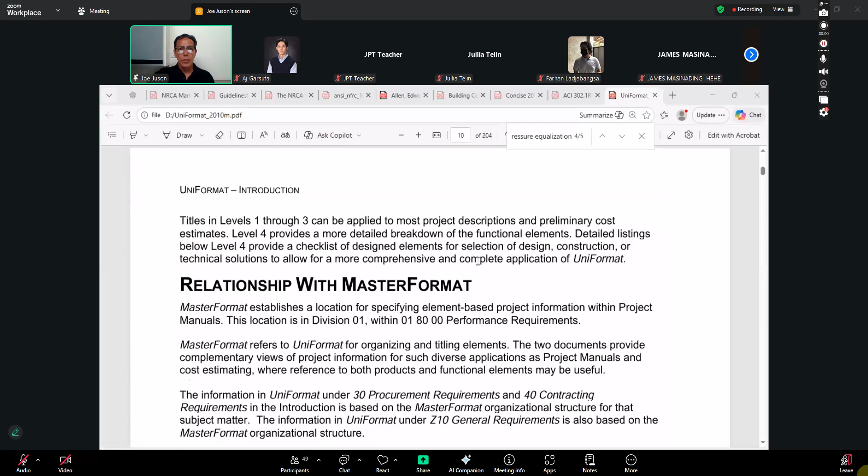So may mga explanations dito. What is the relationship of the unit between the uniformat and the master format? So as you can see, master format is about specifying.

That is not so much our concern right now. So we could now look at each of these. May mga explanations dito, but we don't really have to go there.

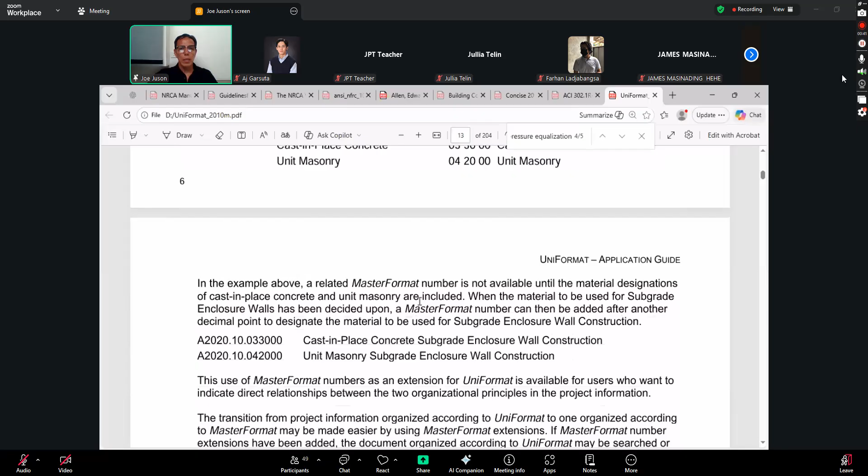We could now start with letter A. So saan magsisimula yan? Here. So the numbering, kasi outline to class, outline guide, for the standards or for the classification. Wag na yan, dito tayo sa letter A magsimula.

So remember, substructure is actually a building enclosure. Pero in building enclosure, the second stage, your agenda is more about protection and defense, how to defend your building. Substructure is one of the 4 elements that we are concerned about. But substructure is also a structure, remember? So nasa first stage tayo, nasa structural stage tayo.

And that is the part of the building that is below ground. So above ground, you call it a superstructure. So the site is on the ground, and not only that, even below ground is part of it. Is a concern. Do you understand now why am I discussing the substructure, including the foundation? Because that is part of the site. So ang building natin usually is, in a sense, relevant as a structure from ground all the way up, from ground below, that is like integrating it with the site. I know we could separate it, but that's why.

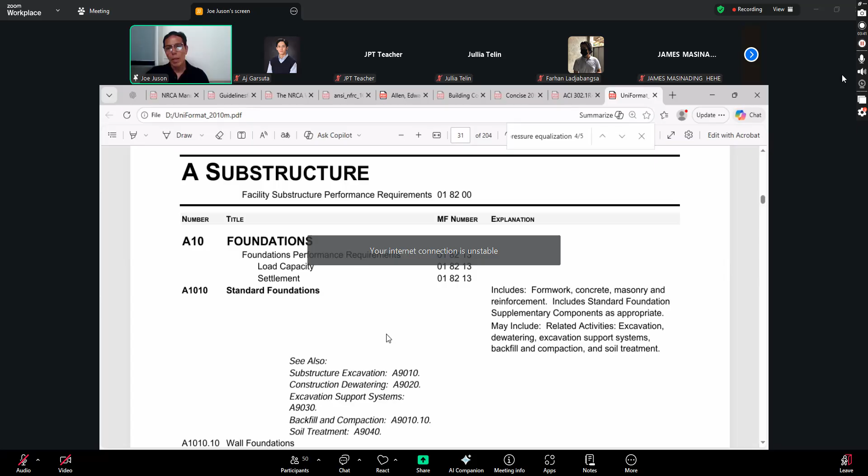So, the first issue in substructure, as I said, is the foundation. Di ba? Sabi ko sa inyo. Ang foundation is part of the substructure. So, surely, when we think of foundation, these are the structural elements of your building. So, load capacity.

Or hindi, no? So those are performance requirements or issues that you have to address in foundation. But as far as the functional element, meaning the footing, the column is concerned, the foundation itself, this is actually broken down into the standard and the special foundation. So you could see there, this is standard foundation. We follow that with special foundation. And some others, marami pa yan, class. So, yeah, I think dalawa lang naman. I mean, maraming klase, ng special foundation.

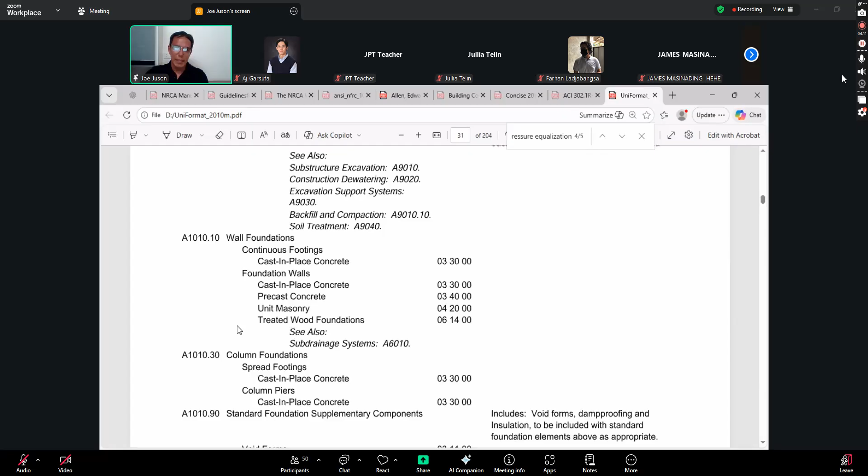All right? Sige. Now, aside from this functional element, the building element in itself, the column and the footing, marami pang nuances yan involved, like the formworks, di ba? Nung nag-usap tayo ng concrete, mahalaga yung role ng formwork. And since mostly, the structure, the material used in substructure is mainly concrete, so formwork will come into play.

Okay? Sometimes the formwork that we use is just the earth itself. Na-realize nyo, pag magbutas kayo ng maghukay, hindi nyo na kailangan formahan kasi yung mismong hukay, yun na yung magsisilbing formwork mo. So that is true.

Okay? Now, hindi rin kaila na at some point, we also use masonry, let's say, meron tayong hollow blocks, di ba? So, nakakagamit din tayo ng hollow block. Pero again, hindi ganun ka-reliable ang masonry. But we are not excluding or totally eliminating that aspect. Reinforcement is also a concern, right? Obvious naman kasi reinforced concrete is usually reinforced.

Aside from that, there are related activities such as excavation. What about dewatering? Now, I told you that water is, kumbaga, ever present below ground. So, during construction, it could be a challenge to remove water from this site. So, mahirapan ka mag-construction kapag nandyan yung tubig, paano ka magbuhos, and so on.

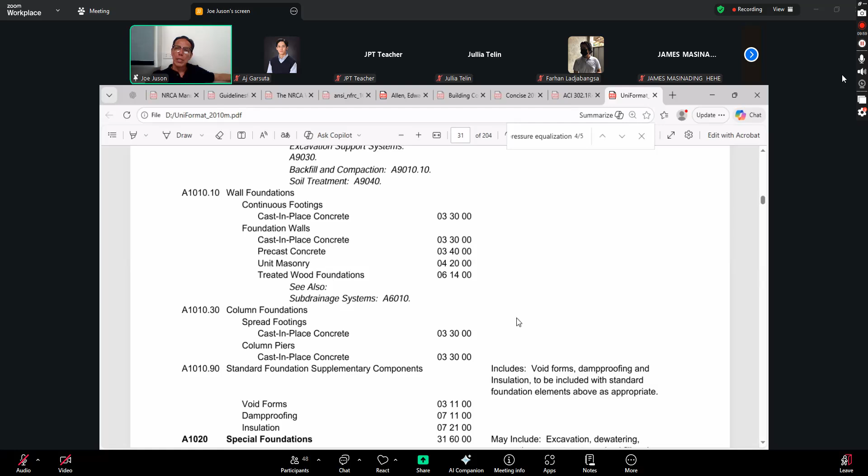Now for column foundations, it can be in terms of footings or it can be piers. That's a different kind, the column piers. So it's like placing many piers, and then on top of that you place the actual footing.

So now, what are the supplementary components that you could find in a standard foundation, whether it's column or wall? Number one is void form. Have you heard of this term? If you haven't, let's try to Google this term, so you'll be surprised - oh, there's something like this. Let's check it out - void forms.

Okay, let's stop sharing for now, then let's go to AI. What is void form? Look at this: void forms are specialized structural materials, usually made of corrugated paper or plastic foams, used in construction to create a temporary space between concrete slabs, beams, or foundations. They are used to support wet concrete - you make it into a form, and later on it just gets destroyed. So they support the concrete but then collapse or degrade, they just rot away.

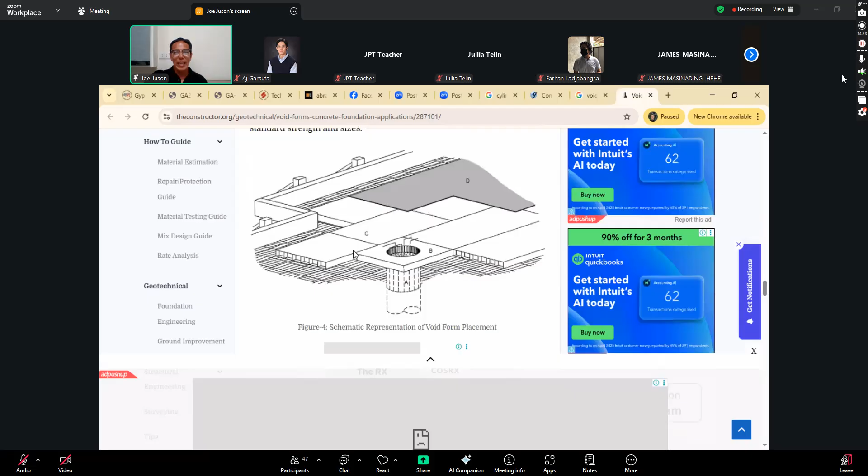So materials, it could be corrugated paper, expanded metal, metal sheet, plastic, styrofoam, or wood. Degradable siya. Karton lang ang ginamit mo para mabulok siya, and then later on, yun na yun. So that is the concept of a void form.

In case you don't know about it, collapsible siya. Masyado na tayong malalim dito, okay? Pero yan ang gusto kong sabihin sa inyo, class — some words, some terms we are not familiar with, right away we could check out what they are. So this concept of a void form may be new to you.

Saan mo makikita ang void form? Sa site works, sa foundation works. Okay, ganun lang.

I hope ma-appreciate niyo itong document na ito, kasi I tell you class, this is the best guide. When you want to study site works and foundation, just go to Uniformat. Yan ang masasabi ko diyan — ito ang tunay na talagang guidance outline na magagamit mo. I am very, very particular when it comes to the structure and organization of your review. I want it to be systematic kasi.

May apat na major materials, may panglima, the site, and then after the structure we go to the building enclosure. There are 4 building elements involved, and 13 concerns. Then we go to the third stage, which is building services — there are 23 items of concern. Then saka ka pala makarating sa fourth stage, which is the finishes, which involve 7 items of concern naman.

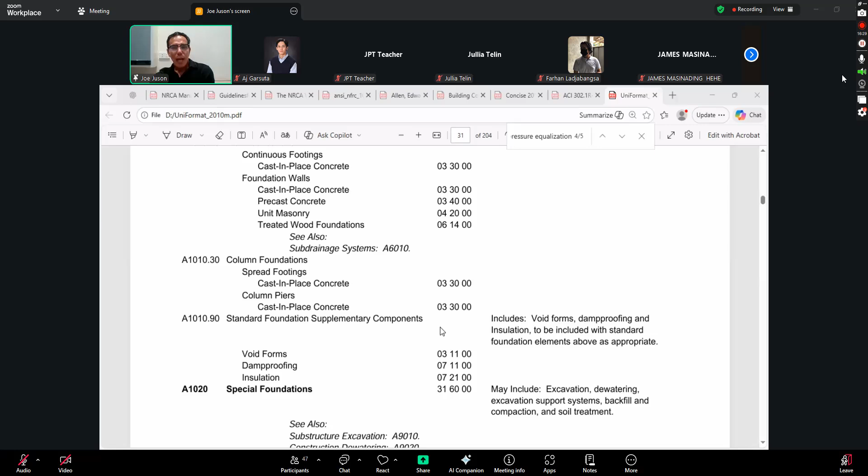So I always count the numbers, ano? Because I have compiled and organized this in my head already kung ano yung building construction. So in the most basic way I could provide it for you. When it comes to site works, this is the best guide. Ang gusto kong sabihin sa inyo is magtiwala kayo dito — I can tell you this is the best standard that you could follow. Hindi mo kailangan ng teacher — syempre, malaking tulong kung may magtuturo sa inyo, pero as you can see, you could do self-study just with this during your review.

Okay, what else? Ano pa mga concern? Oh, look at this — damp proofing and insulation. Take note, this is a protective element. Remember, Uniformat is functional elements, hindi siya necessarily building element, which is ang column, ang poste, ang wall, alam mo, kaya mong hawakan. Pero itong damp proofing and insulation, kung saan-saan mo ito makikita?

Sa bubong meron, di ba? Sa pader meron, sa sahig. Nandito tayo ngayon sa substructure, so kahit sa ilalim ng lupa naglalagay pa rin tayo ng damp proofing and insulation. Damp proofing, hindi lang damp proofing, pati moisture, vapor retarders — bakit? Kasi moisture, water is ever present. Wala pang waterproofing yan.

Hindi naman natin issue kasi foundational, structural lang ito, hindi kagaya ng wall na kailangan mong protection baka pumasok sa basement mo. Hindi pa naman basement ang pinag-uusapan natin dito, structural element pa lang naman, foundation pa lang. But you don't want damp to stay. Damp is like moisture that has no hydrostatic pressure — ang ibig sabihin lang, tumatambay lang siya doon. You don't want that to happen, so as much as possible maiwasan, wag magkaroon ng damp. Lalagyan mo siya ng damp proofing.

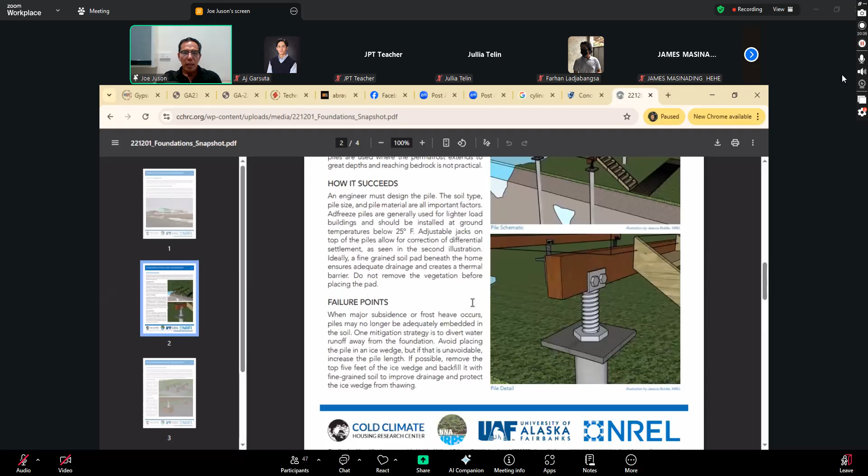So you could have pile foundation, okay? Although we don't have that here, just to give you an idea why we have insulation. Remember this, let me see first.

So you saw class, why do we need to protect our foundation from thermal effects, no? You appreciated that because of these things. That's why you need insulation for our foundation as well.

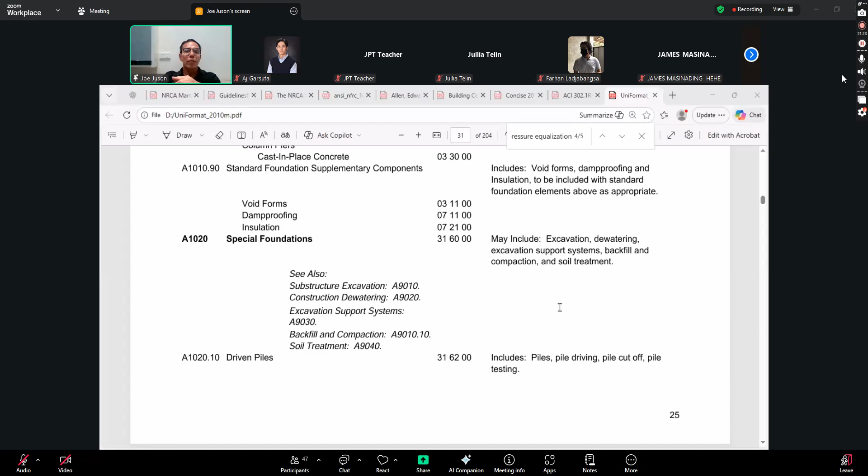Now these are just regular or standard foundations. What about special foundation? So whether standard or special, activities such as excavation, dewatering, backfill, compaction, and support systems all have to be considered.

So we have here driven piles, okay? What are driven piles? There are many others too, like pile caps and so on. Driven piles are piles that are driven in by pounding, so those are driven piles. Board piles, or bored piles, are like ones that are drilled, that's why you see the word drilling.

So part of the challenge there is you excavate at the very bottom and remove the water. Because in bored piles, what actually happens is after you drill the pile, what happens? You put it in, you pour concrete into it, so you reinforce it with steel.

So caissons and bored piles are somewhat similar, no? But the caisson is already too big, so you don't drill it anymore, you actually excavate it directly. So these are sunken or driven load-bearing enclosures. Look at this, an enclosure. After you make a hole there, you build a foundation. Have you heard of that before?

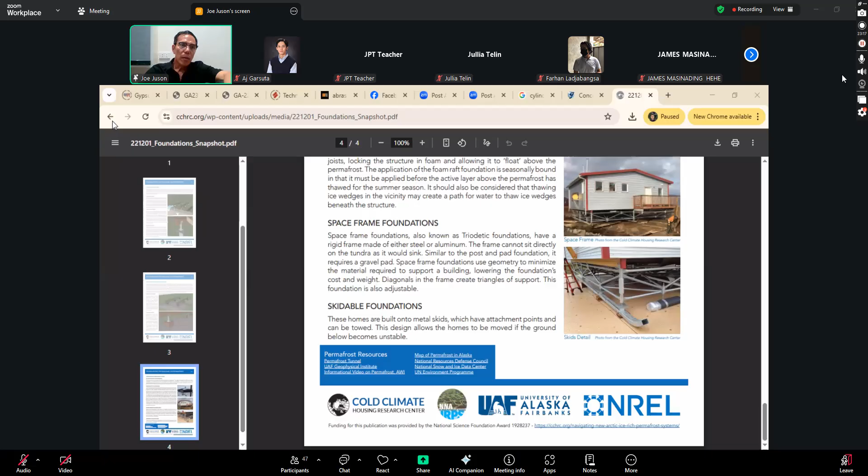So let's take a look at caissons, okay? Let's talk about caissons. What does a caisson look like now? Caisson in foundations, okay, sige, that's fine.

Actually, the caisson has some similarity to a cofferdam, except that cofferdams are found in bodies of water. On land, you call it a caisson.

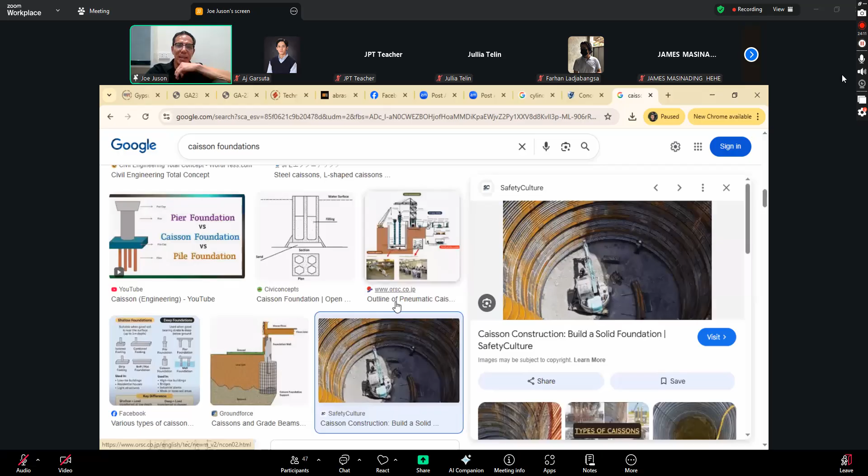So, caisson in foundations, no? In foundations. So you could see there, this is what a caisson looks like. It's like you really make a large enclosure so you can build inside it like this, this big, really an enclosure. So there are construction activities that big. Earlier, with the bored piles, it was like small compared to this, this is really huge, okay?

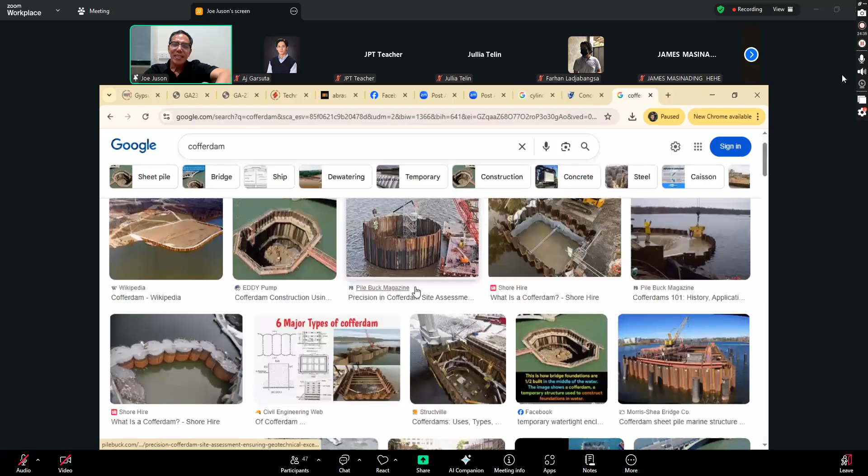The cofferdam, okay, the caisson also is somewhat permanent, no? But the cofferdam is usually at bodies of water, similar to a caisson. And cofferdams are just temporary. So once you've built it, let's say you put up a post and a pylon for your bridge, then you can already remove it.

So here, what is the difference between a cofferdam and a caisson? The main difference between the two is that cofferdams are temporary, whereas caissons are built to remain in place as a completed structure. You get the idea?

So basically that's it, no? So they are somewhat similar, they are almost the same. Are you okay there, class? So again, this is what I'm telling you, we are very well guided by this document, the Uniformat, in our study on substructures or on foundations and even at the site. So trust in that, I tell you, this is the best, the best document to guide us.

As you can see, ang daming purpose ng caisson, to protect your excavation for your foundation, and to promote substructure construction, or it becomes part of the permanent structure. So practically, yung mababasa mo dito, that is the definition of the term. Kita mo yung bored piles, no? You drill, you case, you bell bottom, you excavate, all of these activities.

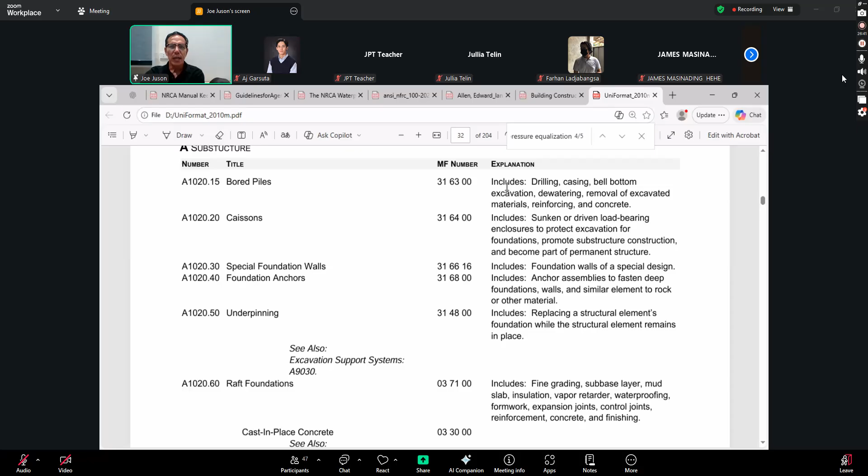So parang masyadong abstract. Let's try to look at it in the internet. What is a foundation anchor?

So parang meron kang iba pang panghahawakan. So in a wall, if you look at this, para hindi bumigay yung pader mo, ibabaon mo siya doon. So that is a wall anchor. Maraming terms yan, maraming ibig sabihin, may tinatawag na soil nail, may mga tie backs and so on. So that is considered kasi retaining walls are part of the foundation. Foundation anchors.

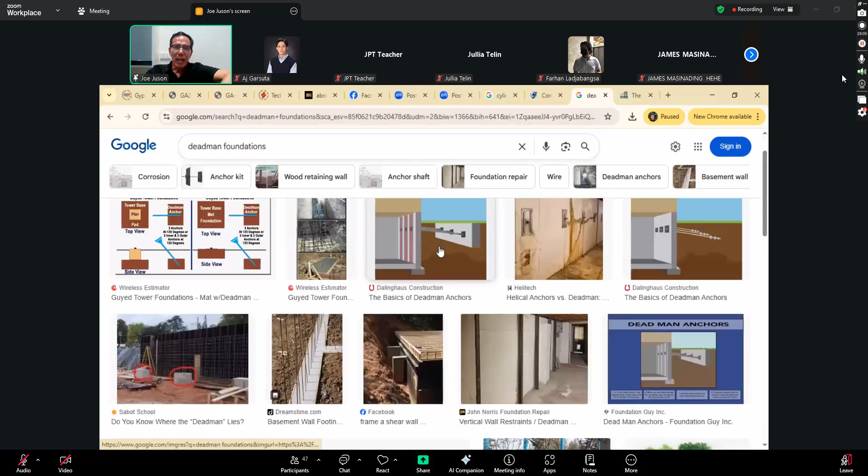Ganyan. Have you heard of the term dead man? Dead man in foundation. So this is what you call a dead man, so maglalagay ka ng mabigat na bagay, tapos isasabit mo siya. Kanina, ang tawag natin sa kanya, wall anchor lang, pero pag meron siyang mabigat na bagay, that's why it's called a dead man, yung mabigat na bagay. So nakikita mo, bubuhusan mo ng konkreto pero meron kang hawak dito para hawakan yung retaining wall mo. So that is a concept of foundation anchors.

Maraming iba't ibang forms ng foundation anchors. I hope that is somewhat, again, just a little bit of idea kung how these things work out.

Yeah, balik na tayo sa ating discussion. Isahin natin to class, no? This is our module 2 practically. Next is underpinning. What is underpinning?

So you could use underpinning in literature, like an underpinning, it's like the basis or the foundational premise. Parang ganun, pero in foundation works, underpinning is essentially replacing a structural, an existing foundation while the structural element remains in place. Ibig sabihin, you are introducing a new foundation not to replace, but pwede mo siyang i-replace. Pero ang idea doon is, hindi na gumagana yung existing, so ikaw yung pamalit doon sa foundation na yun, pero hindi mo na kailangang alisin yung existing.

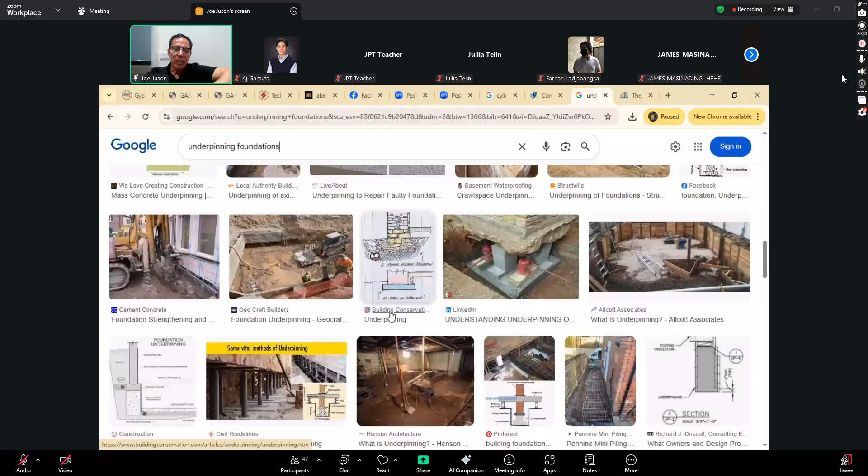This is an example of a needle beam. So ito yung existing foundation niya, tapos gagawan ka ngayon ng needle beam. Itutusok mo siya doon sa pader, tapos lalagyan mo siya ng pundasyon para kargahin niya yung panibago. So needle beam, that is a concept of a needle beam.

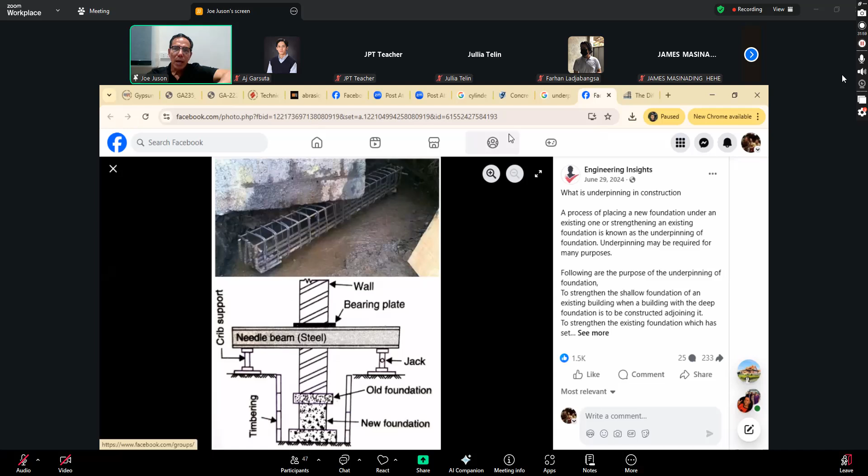For example, yan ito. As you can see, the needle beam, this is the old foundation. So gagawa ka muna ng needle beam, tapos iangat mo siya, and then lalagyan mo siya ngayon ng panibagong foundation, para kargahin ang building. So, the role of a needle beam is very important when it comes to underpinning. I hope you realize that by now.

Sige, balik tayo sa ating... Okay. Next, you have raft foundation. All right?

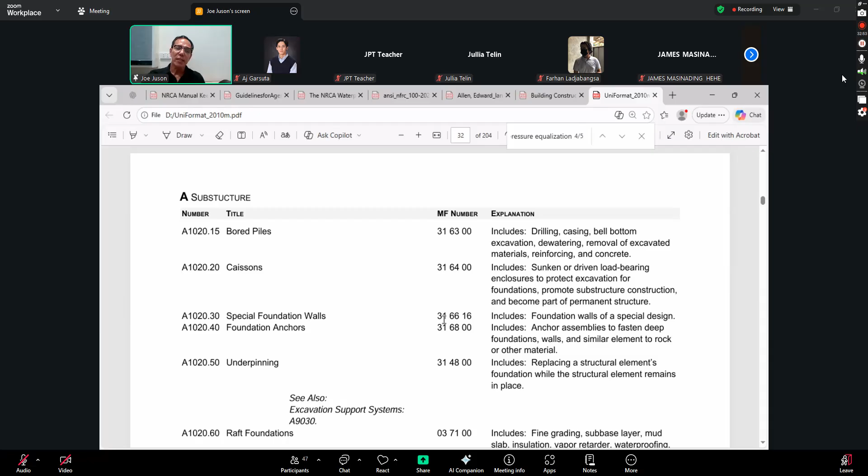So, as you can see, raft foundation is under special foundation. Sa National Structural Code, ang breakdown ng foundation is either shallow foundation or deep foundation. So, most of the time, yung mga standard foundation are just shallow foundation. Pero sa National Structural Code, even yung raft or mat foundation is considered as shallow foundation. So here it is under special foundation.

So what is a raft foundation? A raft foundation is foundation that has a footing for all the columns. So isang bagay lang siya, isang footing lang siya for all the columns. Kasama na dyan yung pag-establish mo ng grading, and even the sub-base and mud slabs, all the protective elements like thermal insulation, moisture or vapor retarder, waterproofing. Then the joints involved, whether expansion joints, control joints, and then the reinforcement and concrete materials, the formworks for your concrete, and all the way to the finishes. So kasi ang idea nga ng raft foundation is it is the whole.

So let's take a look at raft foundation. But maybe you have an idea about raft foundation by this time. Raft.

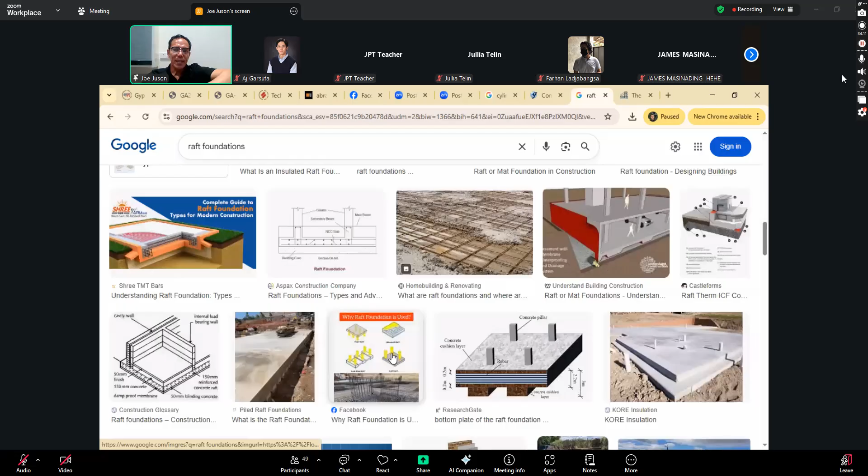So as you can see, a raft foundation is like the foundation for everything. Isang buhusan na lang siya, para sa lahat. So in tall buildings, sometimes the thickness of the raft foundation can go as high as 2 meters. Imagine that, kahit ilibing kang nakatayo doon sa bubuhusang konkreto, ganyang kalaki. So very, very large construction activity yung raft foundation.

Kaya makikita mo, ang daming concerns involved. So raft foundation for tall buildings, makikita mo sobrang laki talaga yan. So in tall buildings, after the piles, magbubuhos ka ngayon ng isang napakalaking raft. Makikita mo yung kapal, parang isang floor yung kapal niya.

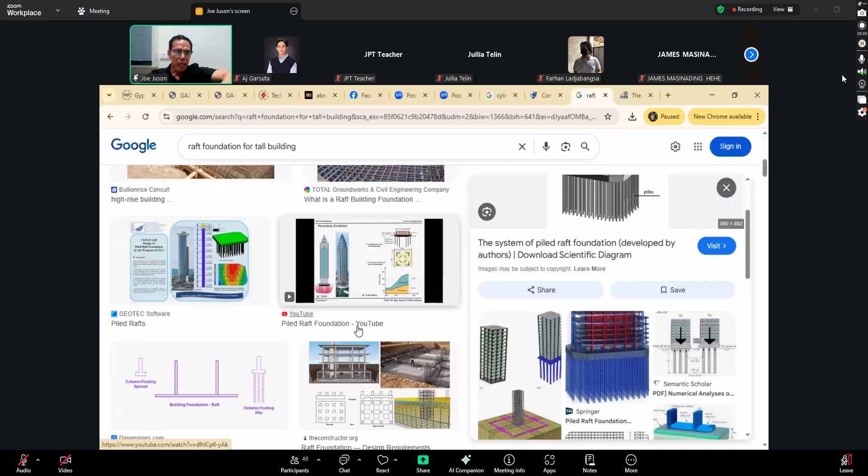Nakita niyo? Okay? So ganyan ang essence ng isang raft foundation, ganyan siya kalaki na konkreto. Meron pa ba tayong ibang pictures dyan that shows the very, very large. So in this building, for example, what is this building? I think this is in...

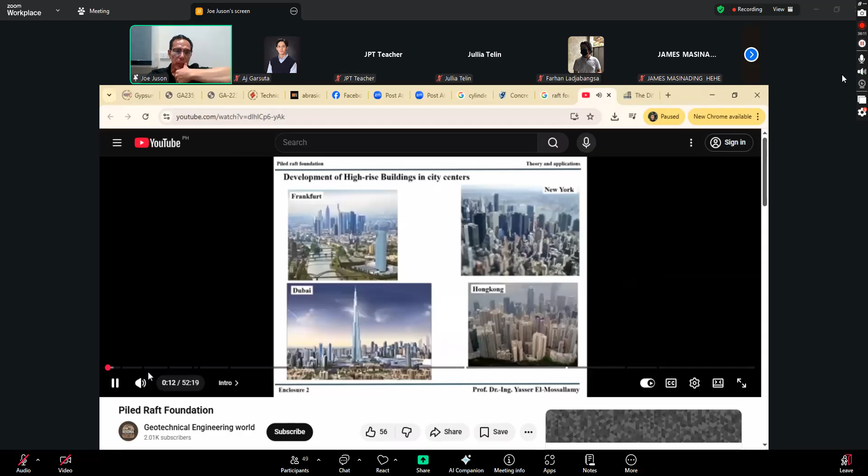So ba yan? Talagang pinagtiyagaan ko yun. Sabi ko na nga ba, sa Frankfurt yun. Wow.

So you could see the raft foundation there. Anyway, so that's enough, that's enough. Okay, tama na yan. So I would think by this time, you already have an idea what is a raft foundation.

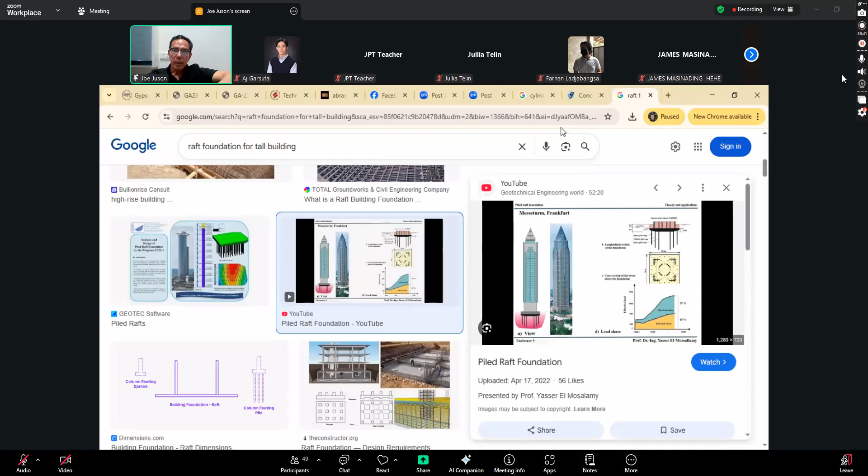Okay, sige, balik na tayo. So obviously, the material is concrete, wala nang iba. So ano pa? Pile caps. So when you have piles, lalagyan mo siya ng sombrero para doon ipapatong yung footing. Ganun lang yan.

So, grade beams, yung mga iba't ibang beam below ground, tie beams, grade beams. So, the structural, you will discuss that as well. All right? So there, all the foundation elements in your substructure are covered here. So, mayroon pa ba kayong kailangang malaman na iba? So, that's all you need.

Kuha niyo, class. So, when it comes to the discussion on foundation, for example, let me wait. Okay. Let's talk about footing. Wait lang, class. So I will have this. Okay. There. Okay.

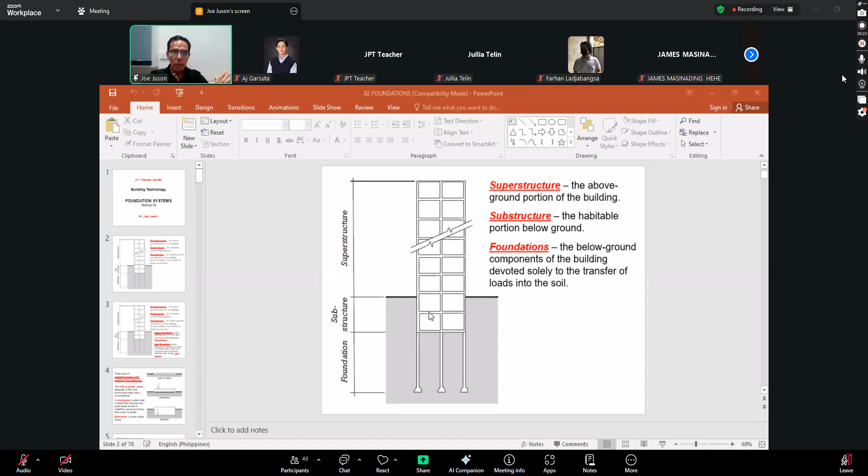Yeah. Okay. So the different footings in foundations, we could quickly browse through here. So the foundation systems, as you can see, we are talking about the substructure and the foundation as described by Uniformat, as actually they're just one and the same. It's just that foundation is the structural, the substructure is the structure, the enclosure. So I told you about the term shallow foundations and deep foundations. So ito na yung mga footings.

So in shallow foundations, you have spread footing, so you have pad and strip and the raft foundation. So I told you that raft foundations are considered as shallow foundations. While deep foundations, you have caissons or bored piles, and the driven piles. Okay? So you have spread or column or pad footing, and then you have the continuous or wall or strip footing.

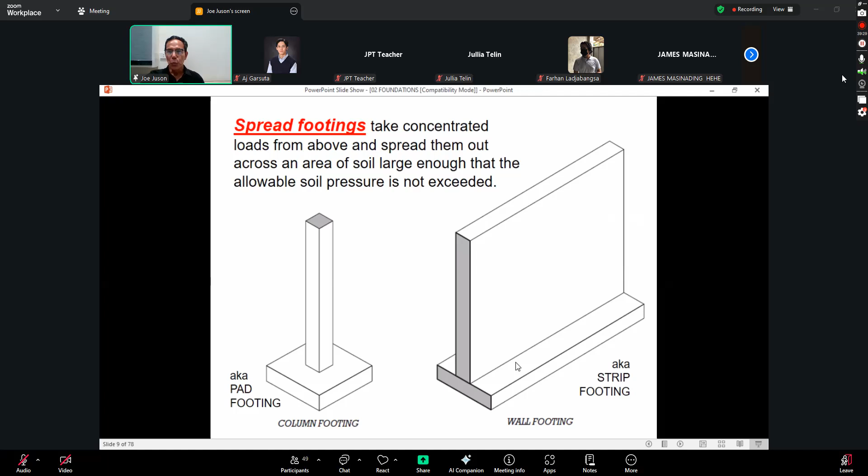So maraming klase, may mga variations yan. It can be made of masonry only, it could be concrete, it could be reinforced, or some trench fill or wide strips. May mga variants pa yan. Ang step footing, at saka tie beams, grade beams.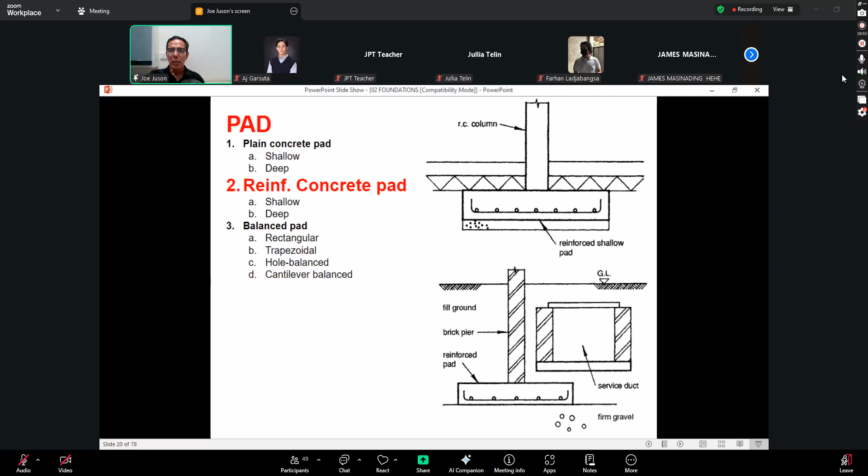Then for spread or pad footing, yan. May mga technique na combined footing pa. So hindi yan raft foundation na nasa topic pa rin yan ng spread footing, yung mga combined footing. Or in some books they call that balanced footing. So depende sa load, like kapag malaki yung load sa isa, mas malaki yung kanyang footing. But come to think of it, when you really do that in construction, hindi ka naman gagawa ng trapezoid. Usually you just excavate as a rectangle, so as long as you comply with the minimum requirement for the dimensions. Then meron pang tinatawag na cantilevered footing. This one is called pump handle footing.

A cantilevered balance foundation is when you are compelled not to place your footing directly below your column. This happens, for example, when your neighbor's footing has encroached into your property. You know it would damage their footing if you disturbed it, so what you do is place a footing that is not aligned with the structural member, the column or the wall. Similarly, if there's a drainage pipe or oil pipe passing through, you don't need to destroy it - you just make a footing not aligned with your column or wall. That's why sometimes this kind of solution is used.

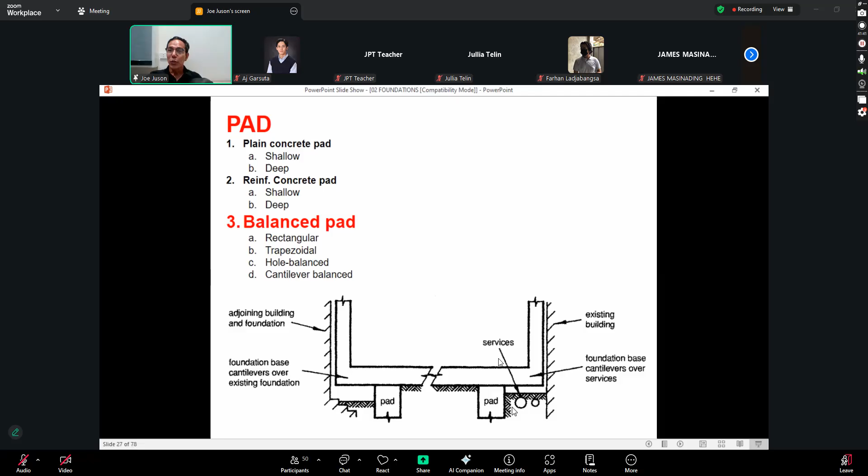I told you about cold joints - these are weakened planes between hardened concrete and fresh concrete. You don't want that to happen because you want it to be homogeneous or monolithic. So this is a very thick foundation, it can reach about 6 feet, 1.8 meters in thickness.

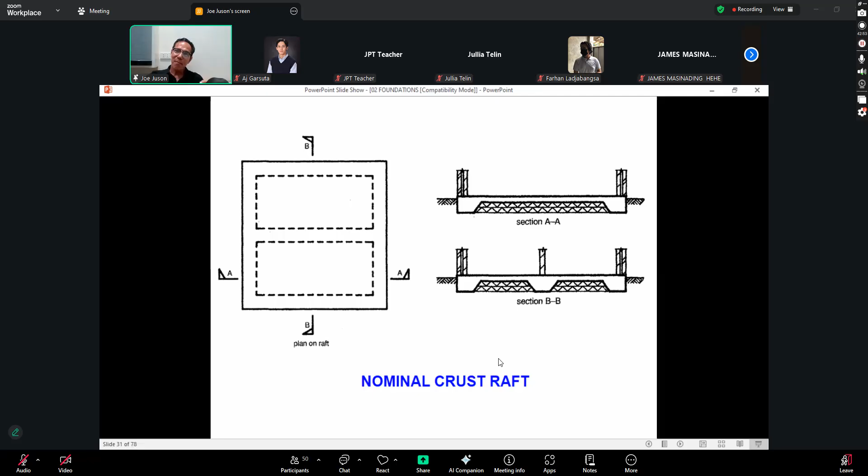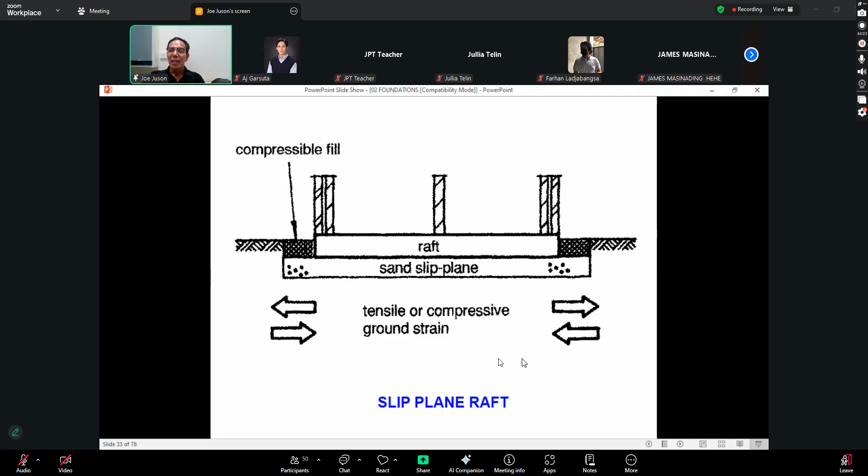There's also a slip plane. So instead of gravel or stone as mentioned, you place a slip plane made of sand. The idea here is that your raft rests on sand so that when there's an earthquake, it just slides on the sand. This way the impact of the earth's movement isn't directly transferred to your building, because the sand absorbs the movement. These are just variations I'm showing you.

Another form of a raft is called a cellular raft. It's like void forms, but this time, since void forms tend to degrade or deteriorate, the cellular raft is like a permanent void.

The idea is related to the concept of - what's it called again - floating foundation, or compensated foundation, wherein the weight of the soil removed from the excavation is close to or equal to the weight of the building constructed. The usual equivalence is 1 story of excavated soil equals 5 to 8 stories of your superstructure. This is what I mentioned earlier - as your building gets taller, you're obligated to dig deeper. That's why you can't avoid having a substructure, a basement. Some use it as parking, of course, but technically it's needed for your structure. That is the concept of a cellular raft.

Some features of a cellular raft: it can be lidded, meaning it can be covered so you can use the space underneath, the void. It also features beam strips to hold all the columns. Some also install jacks - the idea is that when the building loses its proper level or alignment, you can jack it up to return it to its proper position. That's a big help to have this feature, but of course it will entail more cost.

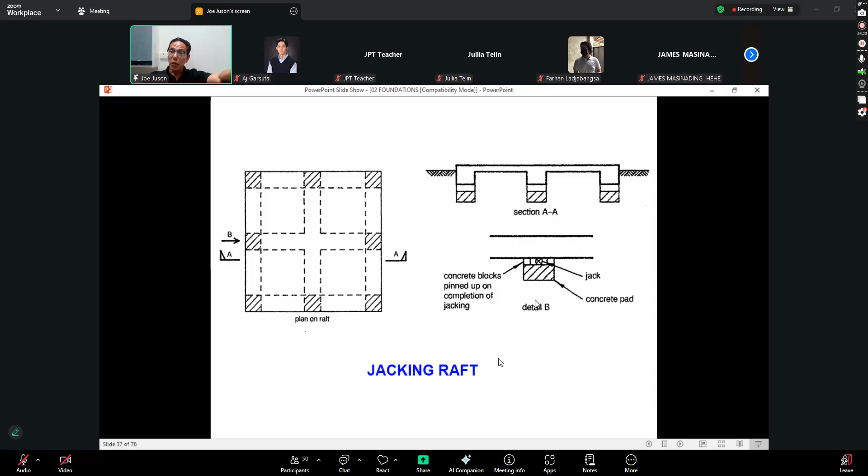But here again, I am showing you the different technologies that are already in place or being practiced through the development of building technology - meaning, through the ages, through the years.

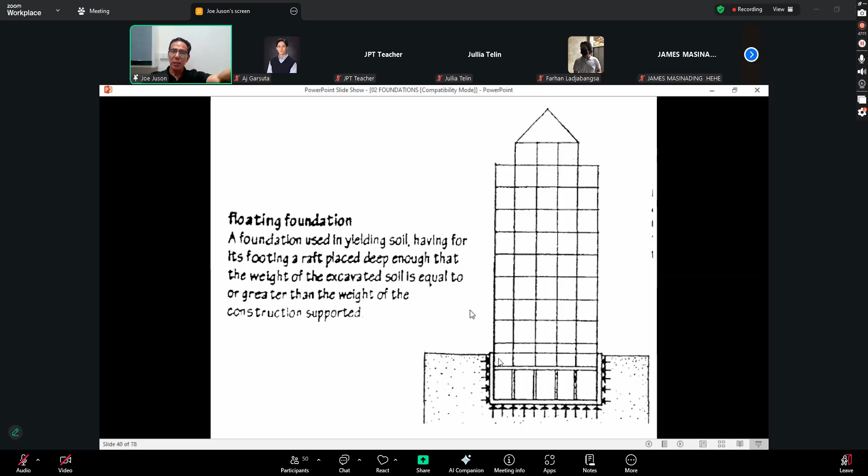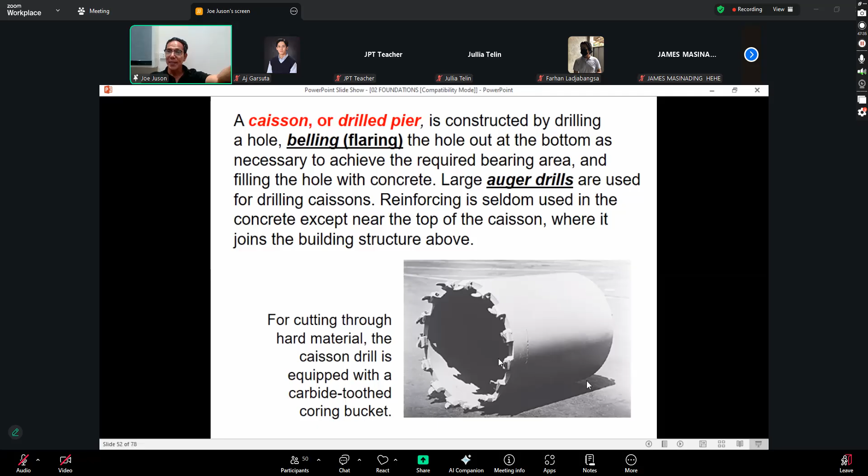And then for piles, meron din tayo niyan. I think we have already discussed caissons. So itong caisson niya dito, drilled pier lang, ang equivalent dito is the bored pile. Ang caisson sa iba, talagang is an enclosure. Makikita mo, ang laki-laki, oh, pero mayroon pang mas malaki talaga niyan, di ba? Grabe yung foundation works, no?

And then for pile driving, ito, pinupukpok. So the idea is to reach a very hard strata, parang bato na siya. So pag malalim ka na, hindi pa rin ka tumatama sa matigas na strata, magpi-friction pile ka na lang, dadaanin mo na lang sa friction ng iyong piles.

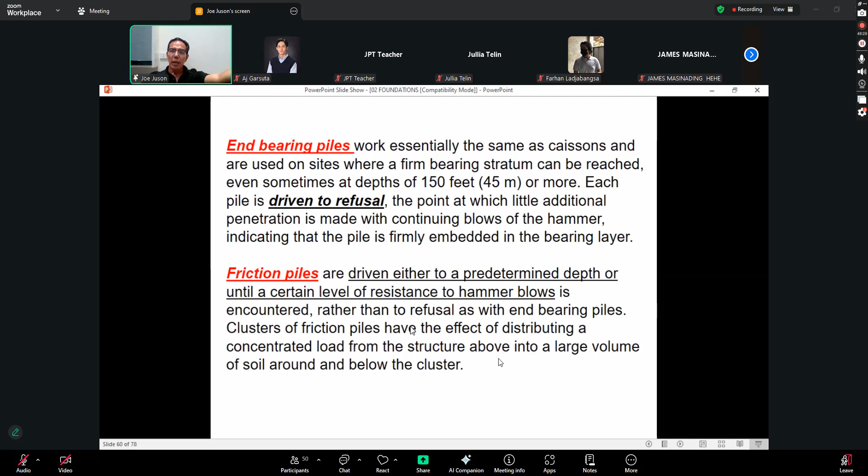So these are pile caps. Friction piles are driven, and ang gagawin mo sa friction pile is papadamihin mo siya, kasi the more na dumadami siya, lumalaki yung kanyang support system.

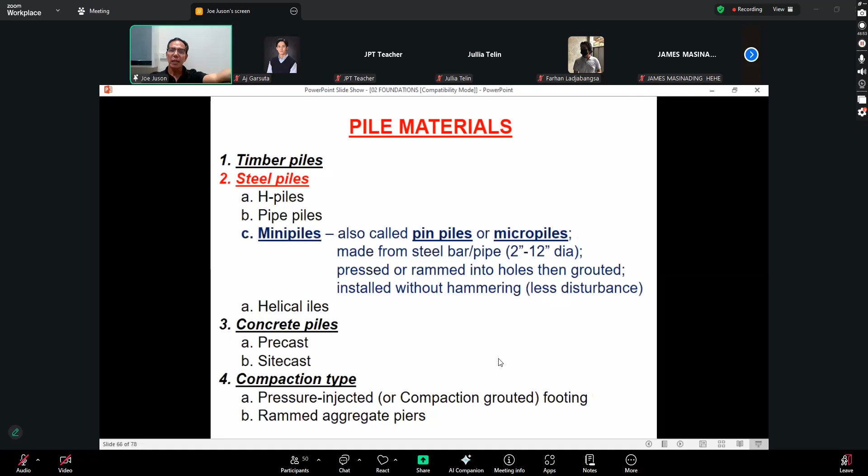Grade beams and materials mostly are concrete talaga, pero meron ding steel, may timber din. So marami pang ibang pile materials na pwede mong gamitin. These are the different systems that are available for deep foundation. Very quickly lang.

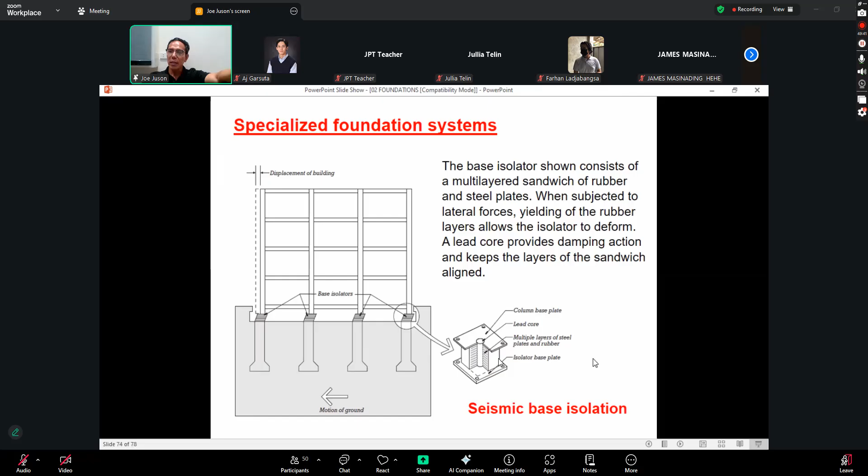Underpinning, I already explained to you. And then this one is called up-down foundation, up-down construction, wherein hindi pa tapos yung substructure mo, parang nakakalusot ka na, nakakaakyat ka na to the superstructure. So this is parang para mapabilis yung trabaho. That is our discussion for the different foundation elements.

So we now go back to the uniformat, let's look naman at the enclosures. Ibig sabihin, doon tayo sa structural, the footing, the columns, the foundation, pero this time, the enclosure. So the basement, the retaining walls, the walls, the basement construction performance. Crucial yan, ibig sabihin, structural yan, the retaining walls, di ba? So we will see iba't ibang klaseng support systems, and then the protection elements.

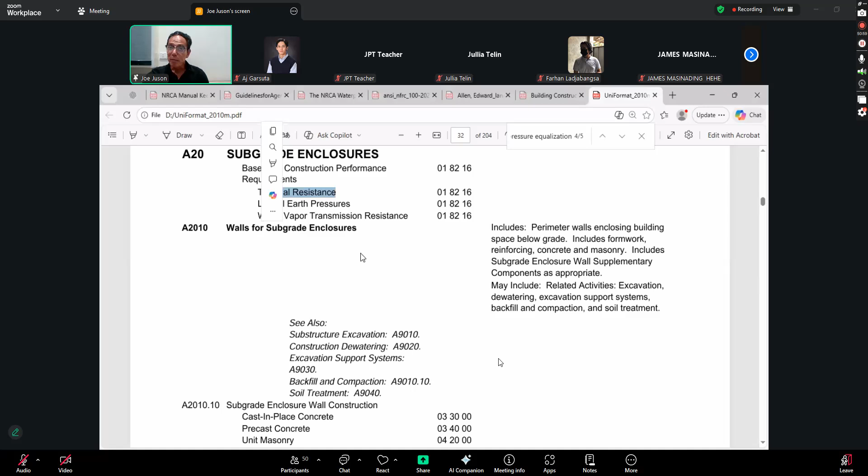So this time, thermal pa rin, I told you about permafrost. Permafrost is crucial, the earth pressures involved, the water vapor is also an issue.

So for the walls in your enclosure, again, we are talking here about concrete. Pwede rin namang masonry, pero the preferred material is always concrete, reinforced concrete particularly. So the usual activities of excavation and dewatering, the support systems, all the way to the backfill and compaction and the soil treatment will have to be considered as well.

So the construction, the priority or preferred material is always site cast concrete. And then look at this, while you have a wall, a structural wall, your retaining wall, pero meron ka pang hiwalay na interior skin, an interior wall.

Babalikan ko yung mantra na sinasabi ko kanina, the more that you separate, the better the performance. So in a sense, kapag merong movement or whatever activities na mangyari sa structure mo, like may tumagos na moisture or whatever, parang ang idea ng interior wall is hindi siya na aapektuhan. So ikaw na gumagamit sa basement, parang hindi mo ramdam na merong mga nangyayari doon sa structural. For example, nag-crack yung wall, which is not saying na uy, may problema, pero ang idea is you don't see the crack at the finish because what you see is just the interior wall.

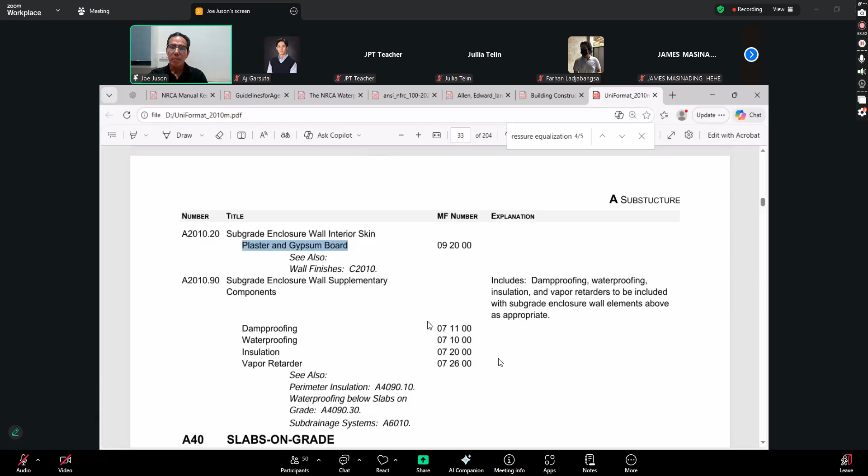What are the supplementary components? The protection elements: damp proofing. This time, waterproofing na. Kanina, nung structural yung pinag-usapan, foundation pa lang, wala pa tayong issue about waterproofing. Pero ito kasi, when you say basement, habitable space kasi yan. So dyan mo madi-differentiate yung foundation sa substructure. When you say substructure, there is a habitable part.

Then insulation, and then moisture. So again, how do you differentiate damp proofing versus vapor retarder? Parang hindi ba pareho silang moisture lang? So difference between damp proofing and vapor retarder.

Let's take a look. Itong mga pinapakita ko sa inyo class, you could just screenshot these things. Anong sabi? Damp proofing and vapor retarders, they both manage moisture, right? Pareho lang silang moisture, no? But they target different sources and states of water. Damp proofing - these are liquid coatings or membranes, keeps exterior liquid soil moisture from penetrating basement walls and slabs. While vapor retarders - these are thin sheets or paints, they control interior moisture vapor, preventing it from entering walls and condensing. So, well, it's not so clear, no? Depende yan kasi sa pinanggagalingan ng iyong source. Alam mo naman si AI, no?

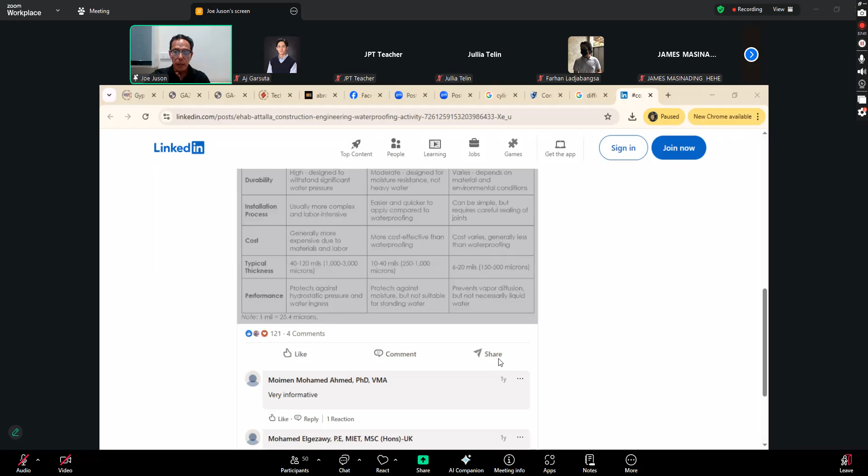And why don't we check this out? Wait lang, class. What happened? Wait lang, class. What happened here? Save as picture.

Damp proofing versus vapor retarder. So, where were we? I'll show this to you. Damp proofing versus vapor retarder. Waterproofing, it prevents water. Damp proofing prevents moisture from passing through. Vapor barrier prevents vapor from passing through. Para bang pareho lang yata.

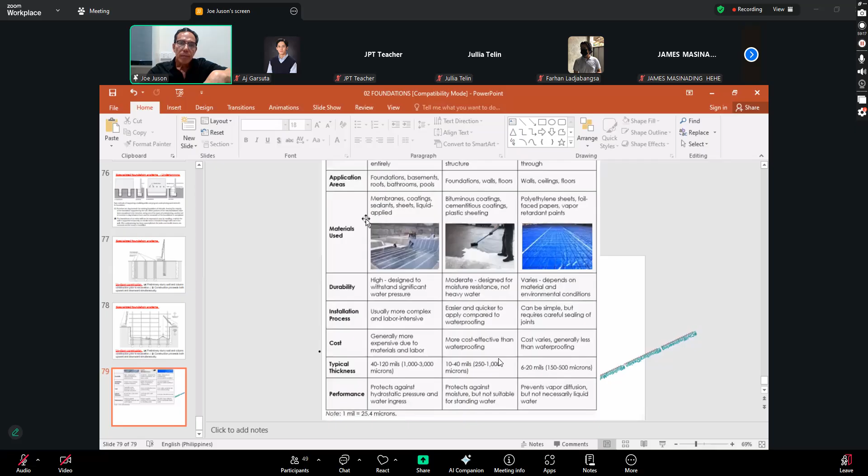Well, check that out, class. Sige, nasaan na tayo? Dito, balik tayo. So, continuing. Ano pa? Vapor retarder there. So, tapos na tayo sa wall enclosure.

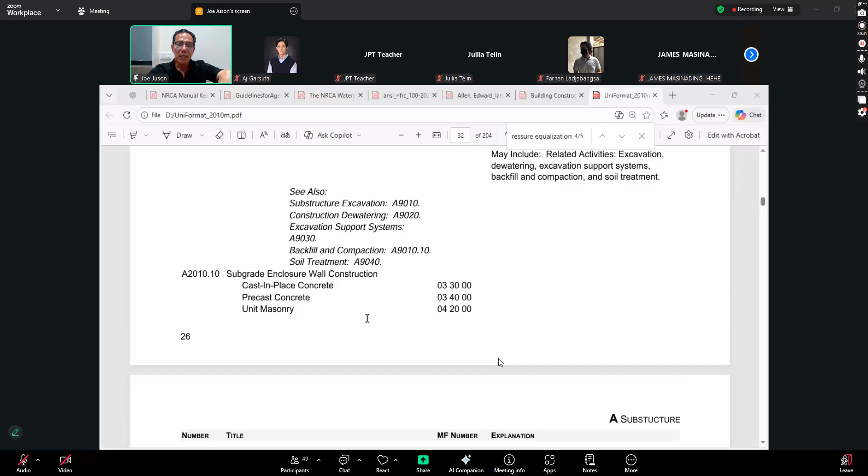So, for walls, that is your subgrade enclosure. What about slabs on grade? So again, what is slab on grade? In concrete we have discussed that already, so we will elaborate further. What are the concerns? The structural concern, load capacity, protection, thermal, moisture, and then there is also an issue regarding levelness. We talked about flatness and levelness before. So what are some concerns?

Slabs on grade - the description of slab on grade is, this is a concrete slab supported continuously by earth or compacted fill. Nakapatong siya sa lupa. It includes fine grading, sub-base layers. So the grade, ano? There's a mud slab. What's a mud slab? Na-mention ko na rin to kanina, although hindi ko pinansin. So what is a mud slab, by the way? Well, let's check it out.

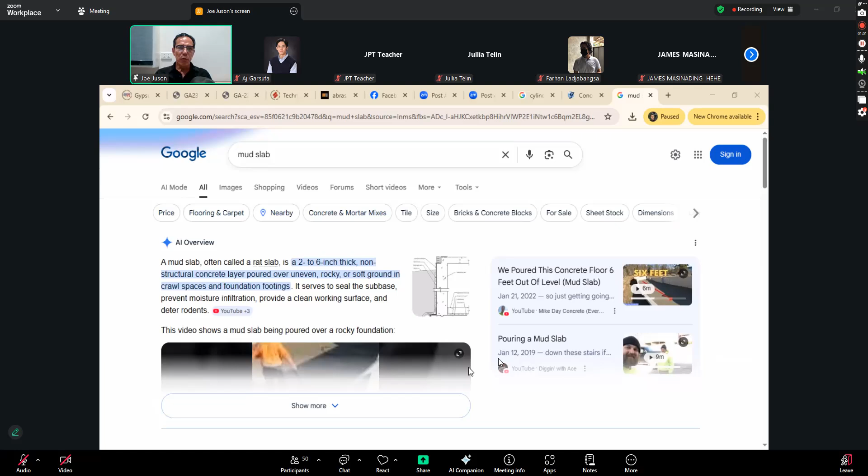So I mentioned earlier the word blinding, saka flowable fill. Let's check this out. A mud slab, often called a rat slab, is a 2 to 6 inch thick non-structural concrete. Hindi siya structural, ha? It is poured over uneven, rocky, or soft ground in crawl spaces and foundation footings.

So the idea, ang ginagawa ko, pag meron akong mud slab, pinapahiran ko siya ng asfalto. Now, non-structural pa lang siya. Tapos, dyan ako maglalatag ng aking bakal. And then, bubuhusan ko na ng konkreto. Yun na yung structural na slab ko. Para siyang preliminary slab, no?

Ginagamit siya to provide a clean working space, if that's what you want, no? You could also seal the sub-base. It also prevents moisture infiltration. So yung pagpahid ko ng asfalto is my moisture barrier. It even deters rodents, no?

Essentially mud slab, pwede siyang blinding, no? Saka flowable fill, at saka CLSM. CLSM is commonly known as flowable fill. It is a self-compacting cementitious material, di ba? Lean concrete. Used as an alternative to compacted soil for applications like mud slabs or blinding. So in short, medyo magkakapareha lang sila ng term, no? Mud slab or blinding. Used as a leveling, clean working platform, mud mat or rat slab. These are basically related terms, ano? So mud slab, blinding, flowable fill, CLSM, etc.

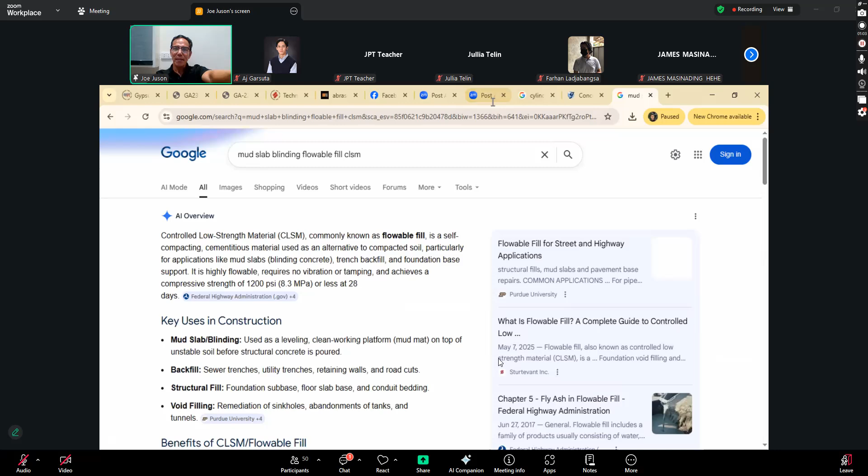Somebody asked a question here: same as gravel base ba, sir? So you don't really call that as gravel. Ang gravel base kasi is loose material, no? At di ba, nung tiningnan natin yung slab on grade, naglalagay ka talaga ng base muna bago magbuhos. Ito, for example, gusto kong magpahid ng asfalto doon sa gravel base, mahirap pahiran ng asfalto yun. So ang gagawin ko, maglalagay muna talaga ako ng mud slab or lean concrete. In concept, pareho siya. Ang gravel base kasi is part of the grade, part siya ng grade. 'Di ba, may sub-base tayo, and then base, and then saka ka maglalagay ng slab. Nung kanina nang nag-discuss tayo ng slab on grade, yun yung breakdown, 'di ba?

So hindi ganun kapareho. Siguro yung gravel base, pagbuhusan mo yan ng konting simento, then magkakaroon siya ng surface, and then pwede mo na siyang, ako, pinapahiran ko kasi siya ng asfalto para magbibigay siya sa akin ng moisture protection. So that is the difference.

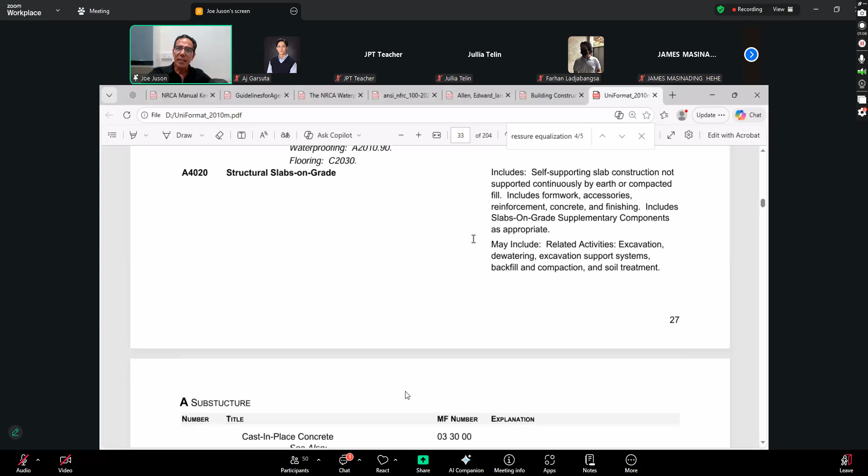So there, the structural slabs on grade. Tandaan nyo, structural na to. Kanina, yung mga mud slab, non-structural yan, di ba? Yung mga flowable fill, CLSM, blinding concrete. So what about this? Slab trenches. These are linear depressions in your slab on grade. The purpose of this, parang nilagyan mo talaga siya ng lubog na part, parang kanal. Ang purpose niyan is para doon, pag merong tubig, doon siya pupunta. So, to collect and transmit liquids. It includes a cover, if necessary, trench cover.

So, slab trenches, let's see what a real slab trench looks like. Take a look, what about that? So you could see slab trenches here. Nothing special, no? Mukhang ito na yung pinaka magandang picture for that. Slab trenches, see some images.

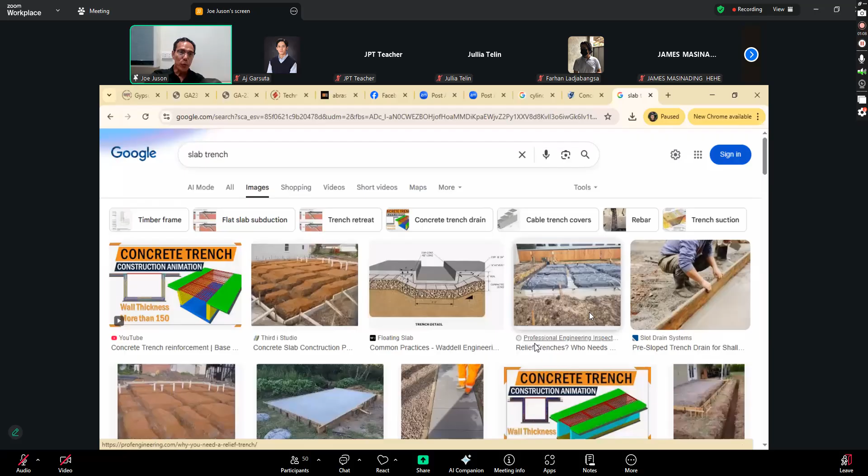Nangyayari yan. Naka-experience na ako ng basement na nag-leak yung retaining wall. So bumaha, nagtuturo pa ako nung class. Bumabaha yung klase, hanggang sinuspend namin kasi ang lakas ng ulan sa labas, tapos lumapasok na yung tubig. So it's dangerous na nagkaroon ng ganyang event. Pwede mong i-demanda yung building, it was a hazard actually na nagkaroon ng ganyan.

So slab trenches, what about pits and bases? Para na rin siyang slab trenches, except that meron ka na talagang parang balon or tangke. So this time, these are also depressions in your slabs. Pero yung slab trenches, linear siya, para siyang kanal. Ito, meron kang assigned na area na para siyang tangke or cistern. Ang cistern kasi, ang idea ng cistern is cold water, drinking water, just like septic tank is.

So ang pits and bases are essentially sump. Sump, okay? So you understand the word sump? Sump. So what is a sump? A sump is a low-lying pit, tank, or basin designed to collect liquids such as water, sewage, or oil.

So depende kung ano man yan, wala siyang specific na liquid. Usually ang sump may kasamang pump, sump and pump, medyo partner yan palagi sila. So what does that tell you? Pag nasa ilalim ka, nasa basement ka, hindi mo na madidrain yung tubig, so kailangan mo siyang i-pump para maalis sa building. So sump and pump ang kadalasang naririnig ko na term for that.

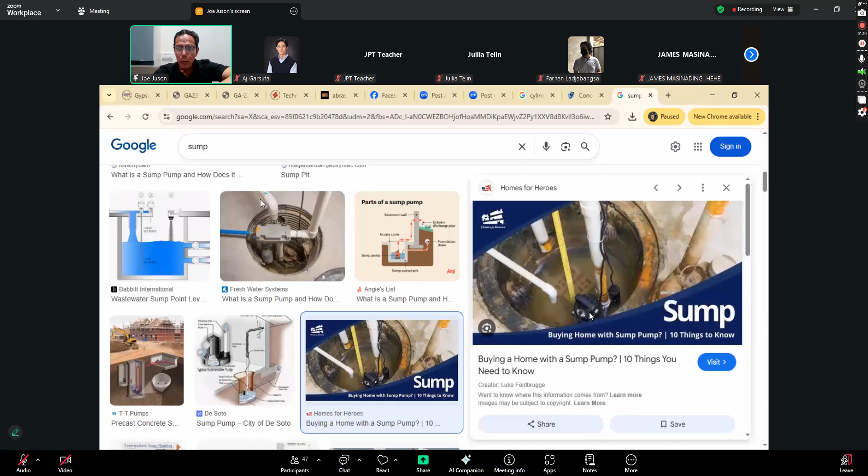Just to show it to you in the internet how it looks like. This is how it looks like. So you could see, meron siyang kasamang pump, so that is the concept of a sump. Notice that a sump is usually bilog. So makikita mo yung sump dyan, maiipon yung tubig dyan. Mostly, pag sabihin mong sump and pump, sa tubig ulan yan.

Lalo na pag meron kang basement, dyan mo kukolektahin yung tubig, and then ipapump out mo siya. So that is the concept of a sump. Do you follow? Okay, so I hope class, marami kayong natutunan ngayon.

We are just talking here about hindi pa nagsisimula yung building natin, nasa ilalim pa lang tayo ng building natin. Pero parang nare-realize mo na ngayon, ang dami dito ah, so pits and bases. So structurally, you are going to prepare this, but in other words, we call this sump. Sump, okay.

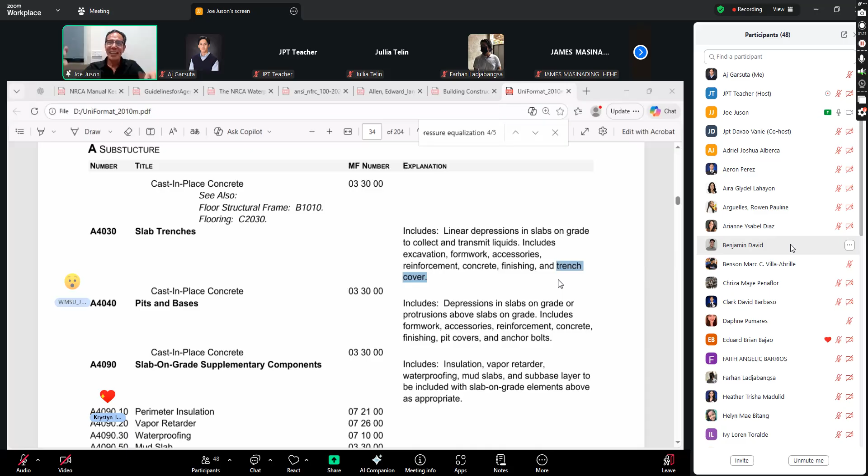So sometimes they are above the slab on grade, ang ibig sabihin, para siyang balon, pwede rin ganun. What else? Notice that mostly, if not all, the materials used for these structures are made of cast-in-place concrete. Concrete lahat, kaya nga sabi ko, module 1 natin concrete. After that, siteworks kagad tayo at saka substructure kasi concrete talaga yan. So nare-realize nyo na ngayon, halos lahat ng discussion natin, concrete.

O, ano pa? Mga supplementary components. Again, dito makikita mo mga protection elements, insulation, perimeter insulation, vapor retarder, waterproofing, mud slab, okay, and then may sub-base layer. So kung tatanungin mo ako, yung gravel base, baka dito pa yun, kaysa sa mud slab. Baka yung mud slab. Okay, so lahat ng mga bagay na to, pagkailangan, marami kang mga supplementary components.

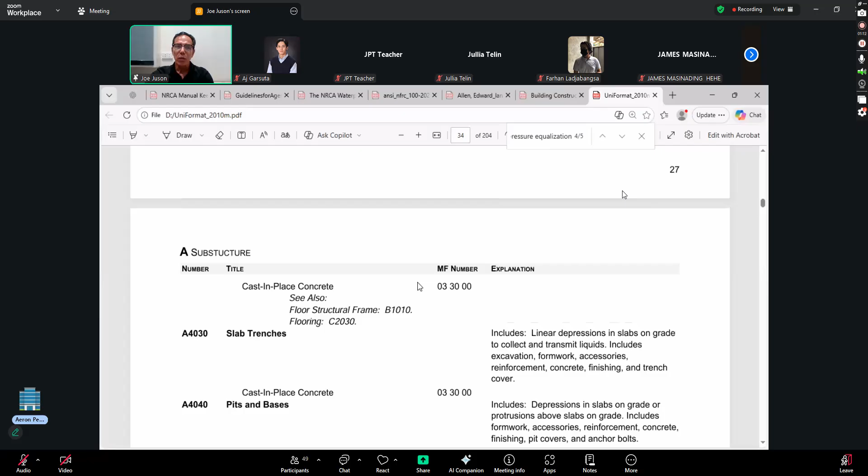So what do you notice now? Ang discussion natin nagsimula sa foundation, the structural, and then the enclosure, the wall, and then the slab on grade, yung horizontal naman. So what's next here? Pati water and gas. So sa water, kailangang i-drain mo yan. You must provide a system to collect moisture and water below grade.

So may mga issues like excavation, even yung perforated pipe if needed, to collect the water. So usually you will find this at the perimeter. Drainage boards, so drainage mats, yung iba ginagamitan. So let's talk about that here. Let's see, foundation protection. So here is a...

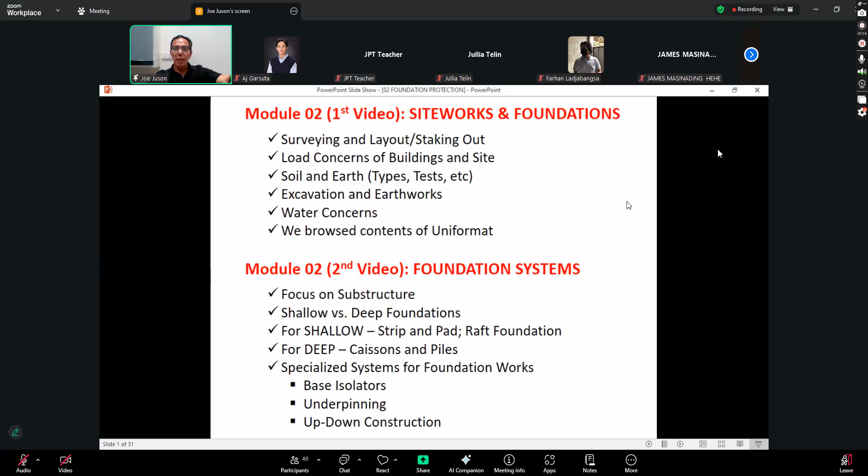So we need protection elements for water in our foundations or substructure, so drainage. Remember, concrete alone is not adequate for waterproofing because moisture can migrate in the microscopic pores. This could be through cracks, tie holes, utility penetrations, and even the joints that occur, like cold joints. So drainage is to draw the groundwater away from your substrate. Waterproofing is a barrier talaga.

But you have another option. Ang backfill, hindi mo maasahan yan class, because it is soil, it is earth material. Mas matagal siya mag-ipon ng tubig, so tatambay yung tubig doon. Kaya nga yung sabi ko sa iyo, yung damp proofing is important here. So drainage mat or the drainage board, pagpasok ng tubig, it will be drained down. So it will go to the perforated drain.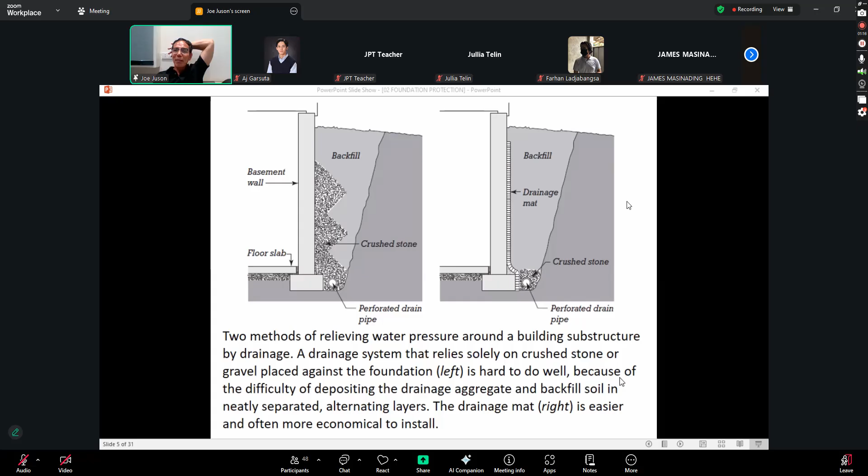Now ang tanong dito is, saan pupunta yung drain na to? Ang tawag natin dyan to daylight. So this pipe to daylight, ibig sabihin either pupunta yan sa a sump or a tank or a slab, a trench, or pit or base, or it could drain to outside, to the sewers. Eh, ang problema nga, kasi nasa ilalim ka na ng lupa, so meron pa bang mas mababa sa iyo na lugar na pagpupuntahan ng tubig na yan? Depende sa sitwasyon.

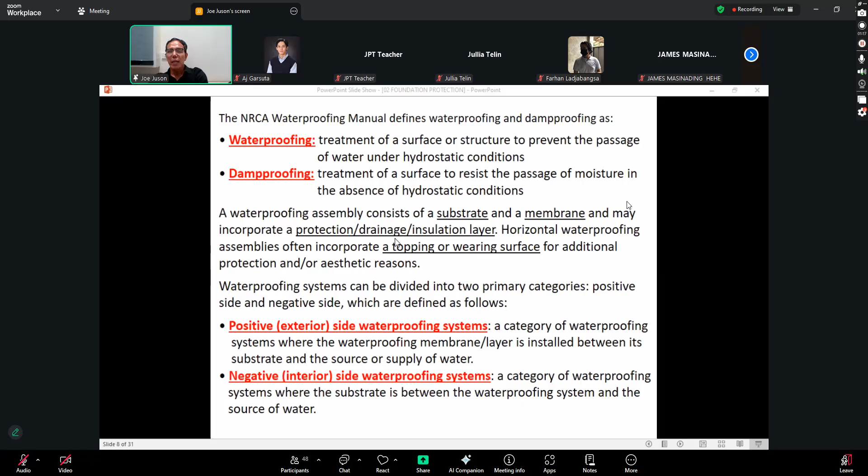So you see the different features of substructure drainage. Again, even cement plaster, damp proofing is good enough. Again, remember, absence of hydrostatic conditions, pero yung waterproofing, there is a hydrostatic condition. That is the essence of this discussion about drainage.

So what else? So drainage, off-gassing. When it comes to off-gassing, dalawa yan: radon at saka methane.

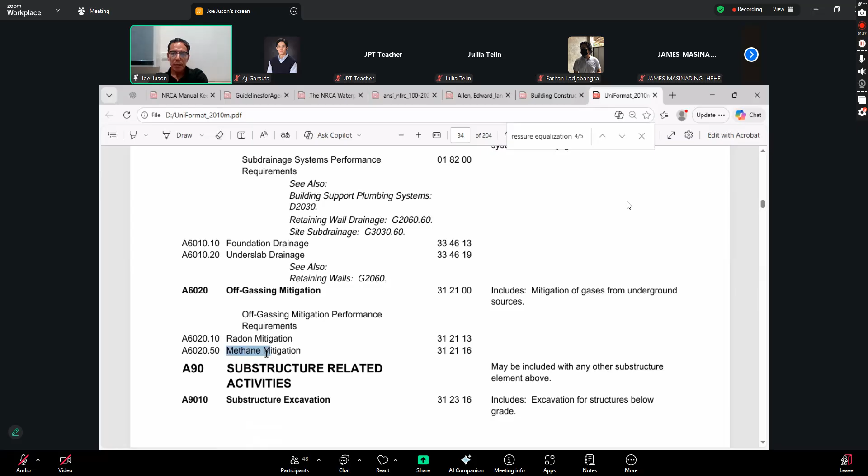So what else? The activities during construction when it comes to substructure is also very serious, ibang-iba yan. Actually I call it the dirty works. Ako kasi class, I'm a builder, but I'm just a builder of houses. So when it comes to substructure, napaka low impact lang. In fact, in the more recent projects I did, hindi na kami nagsa-substructure, hindi na kami nagsa-site works, because what we do is just we acquire existing houses so that wala na kaming ma-skip na namin yung part na yan. So meron ng existing structure and then we just renovate the house.

So parang hindi para maiwasan yung stress, hindi na stressful yung project. I don't know if you can relate with that because as young architects like you, usually you want projects that begin at the start from zero. So kumbaga sa akin, pagod na ako sa ganyang bagay.

So there are so many substructure activities, starting with the excavation. Then after the excavation, you return the earth material, so that's called backfill, and then you compact the earth material, so that's compaction. Then the dewatering, basically as I said, the dewatering is removal of water during construction activity.

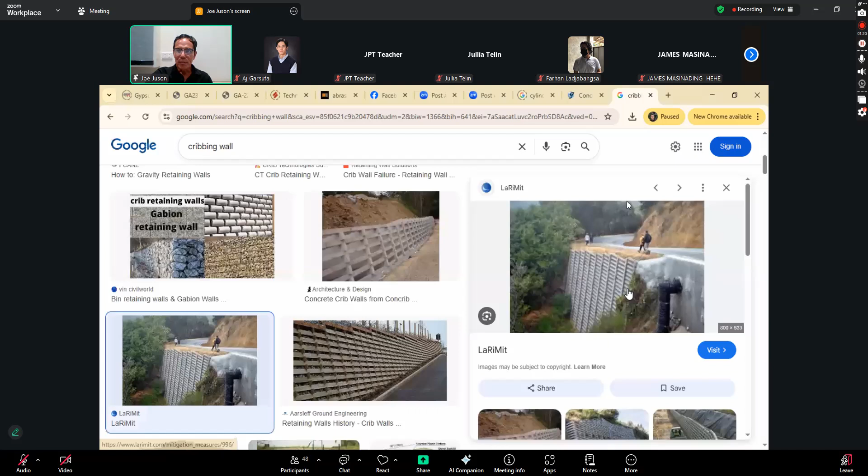So pwede mong gawin yan as a technique for earth retention during your excavation. So you could have riprap. What about riprap? Riprap naman is just loose stone. What about revetment? These are retaining methods, different methods for retaining.

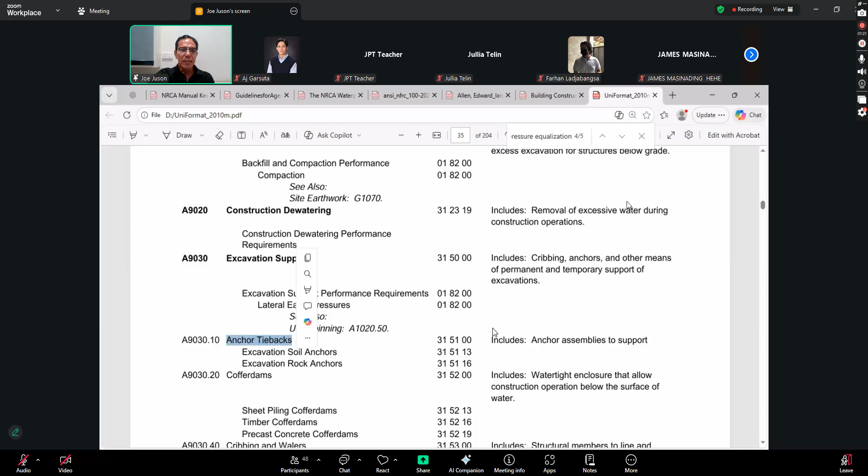What about, sige balik na tayo dun. So you get the idea now about the many ways you could support the excavation. So anchors, we already understand that, and other means of permanent and temporary support. So this could be made permanent or they are just temporary because they are just needed for your construction. So what about anchor tiebacks? Kanina we talk about foundation anchors, let's go to anchor tiebacks, tiebacks in foundation.

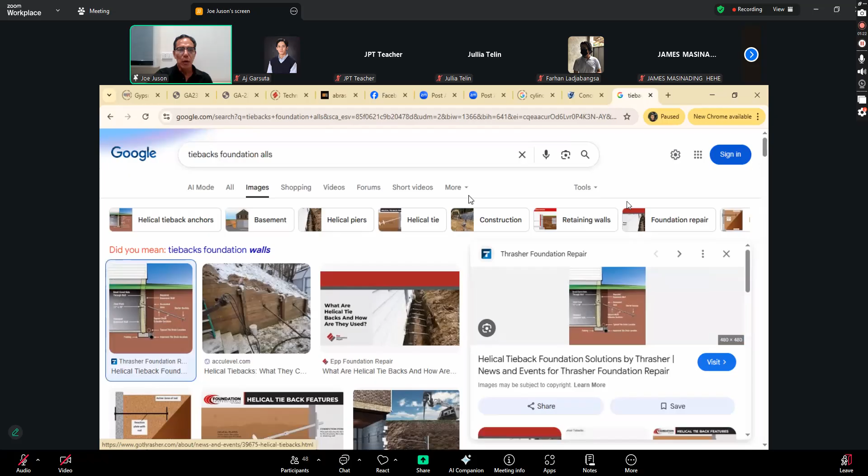So a tieback would look like this. It's basically something like anchors as well. Some would call this soil nail, but essentially what you do is you drill through your foundation wall, then you have a pipe, and you put a tendon in it. Then you put epoxy, and once it cures, you post-tension the tendon, pull it, and then you anchor it. That's why it's called anchor tiebacks. It grips onto the earth - that's the idea of a tieback.

So that is one way to strengthen your excavation so it doesn't give way.

Lots going on, right? And we have talked about coffer dam. So what is a coffer dam? A coffer dam is the watertight enclosure when there is water. But we also saw that coffer dam is temporary while caissons are permanent. Now, sheet pile - timber or sheet piling.

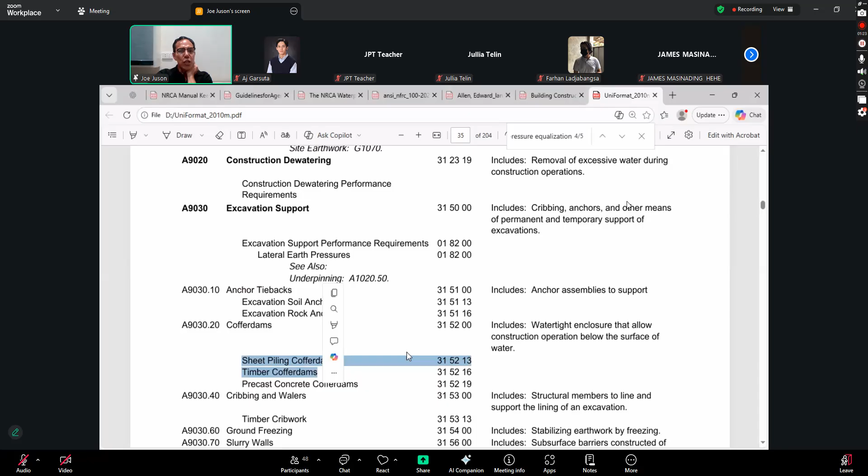So what about sheet piling? Let's talk about sheet piling, especially steel sheet piles. Have you seen sheet piles before?

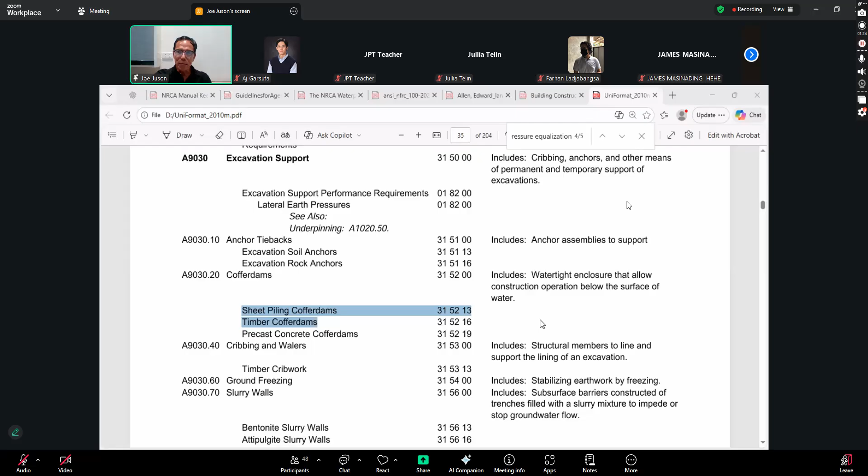Alright, so there are so many items of study here, class. So what about slurry wall? You've seen cribbing already. What about slurry wall? Let's talk about slurry wall.

So slurry wall, especially concrete foundation. A slurry wall is like you are going to build a wall first. You'll see that the slurry wall really has a tieback. Before you start construction, it's like a very large enclosure.

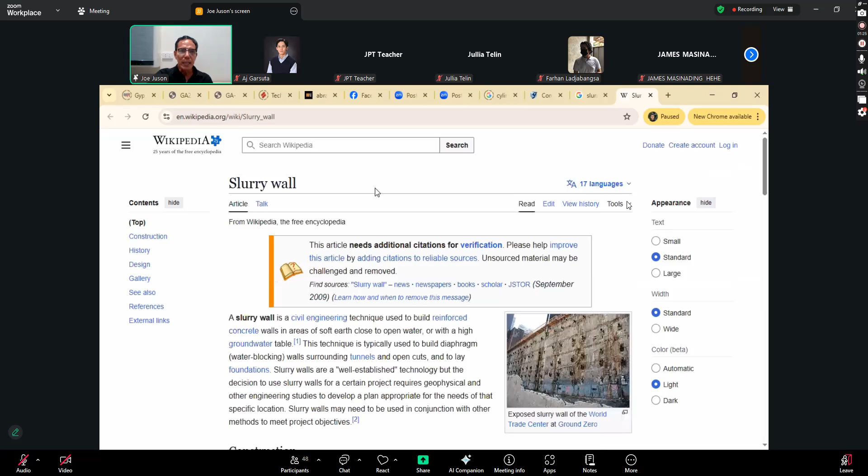So usually you build the slurry wall all around your site before you start building the whole structure. You cordon it off with a slurry wall all around. For example, in the World Trade Center, they first put a cordon of concrete all around the perimeter - a slurry wall around the whole area before they started the building.

So this is... it also serves as a waterproofing. Okay, let me see. There. All right. So you could see the slurry wall here.

So all around the site, you wrap it first with a slurry wall before removing the earth material inside, and then you start construction from the bottom. How deep? 80 feet was the depth of the slurry wall. And there was even a train tunnel that passed through the World Trade Center. Wow! So again, you can see the role of the slurry wall in construction.

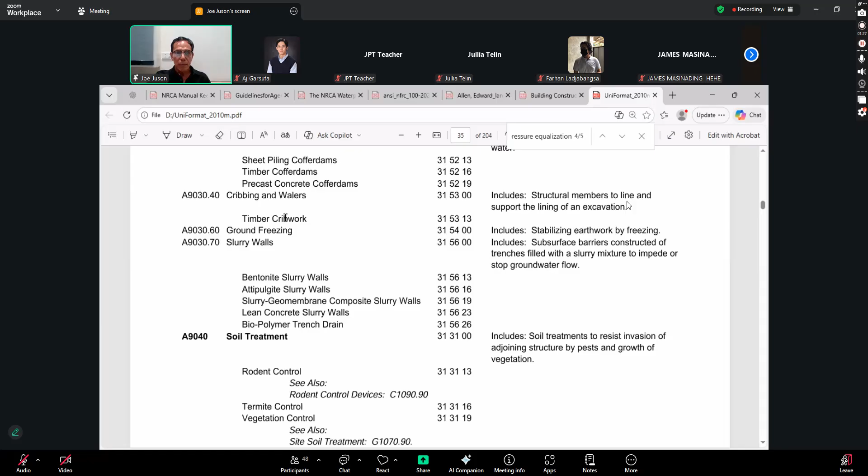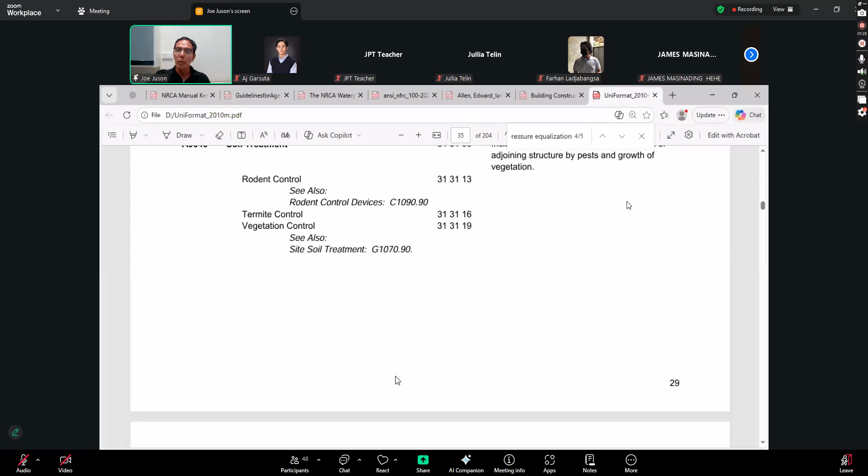And then finally, we have soil treatment. I told you about soil treatment - it's not just about termites, you're also concerned about rodents. Here, it seems normal that when a building is constructed, there are cockroaches, rats - as long as there are no termites, it's okay. But that shouldn't be acceptable - those should also not be there, and also vegetation. So when you clear out, when you excavate, including the grubbing - that's what it's called, clearing and grubbing - you should remove the roots of trees and grass, because they'll just grow back in the soil. That should be the case.

All right, perfect. The time now is 2:59. So we will have another 15-minute break, and after that we are going to deal with letter G. I have 1 more minute.